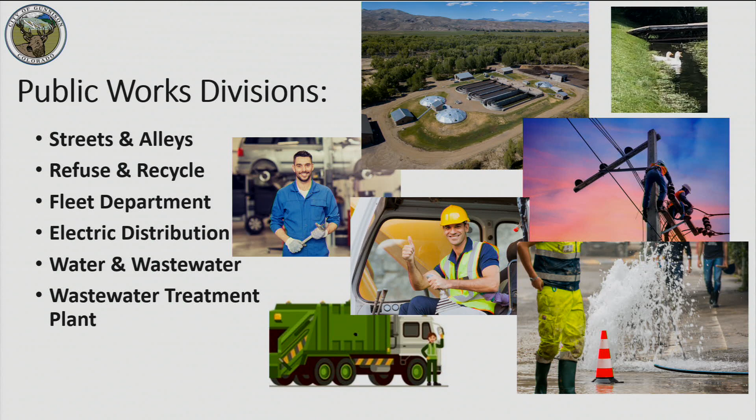Basically what we have is we have several divisions. We maintain the streets and alleys, we pick up the garbage and recycle, and we maintain the fleet for all of the equipment. We also provide electricity for the city, and we treat the water for drinking water and wastewater, and we also have the treatment plant.

So streets and alleys, we have over 100 miles of road. That's about 34 centerline miles, because the roads are so wide that it's a lot to maintain. But we do it, and we do the snow plowing, street striping, and pothole repair.

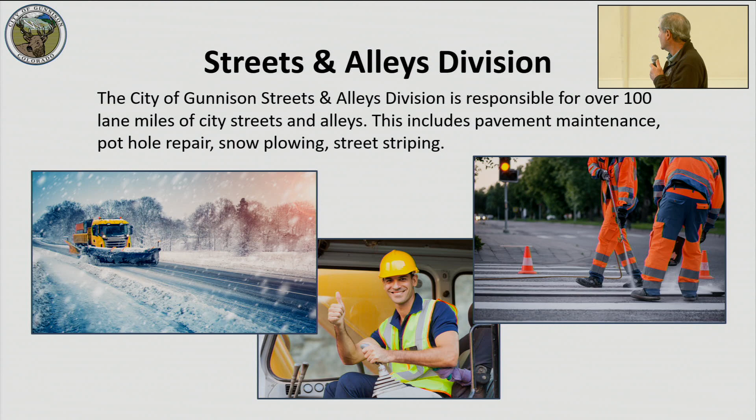We also pick up the garbage and the refuse, the recycle. We have 7 different containers that you can put your recyclables in, because we rely on the county to dispose of the recycled - that's 7 different products that they have. But also we pick up the trash, and I don't recommend filling your dumpsters like that, because that attracts bears and birds and all that kind of stuff.

Also, we do the tree dump. That's just for limbs and leaves and grass clippings and stuff like that. We encourage everybody to do that, because we actually recycle these products. We'll also take concrete and asphalt if it doesn't have steel in it, because we like to use that for our road base. So it's a good thing for the community - it gives you a place, it's a little bit cheaper than the landfill, and it also allows us to recycle the products.

We also do electronic recycling. This is something that we do usually the first Monday of each month, and we take TVs, radios, microwaves, all that kind of stuff. There's a fee for that, but it keeps us from landfilling that, so that's a good thing.

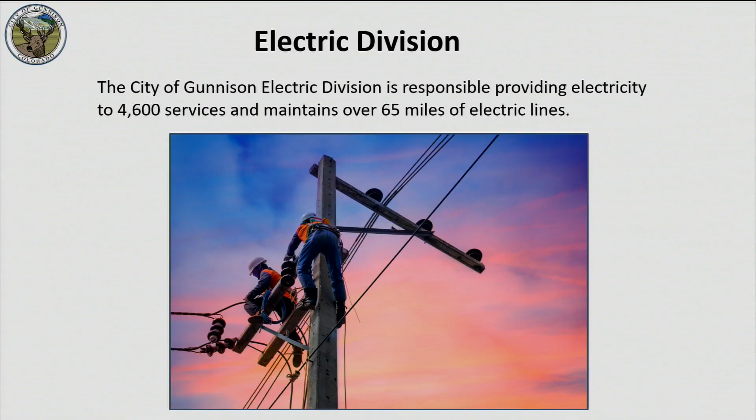So on the water and wastewater, obviously we have water distribution. We have 9 wells in the city - those big brown houses that you see in the middle of the street, that's a water well. When I first got here, I'm like, why would we have a well in the middle of the street? But anyway, that is what we have there.

We also treat all the wastewater, and that's where we return the liquid to the Gunnison River, and then the solids we turn into Gunny Gold.

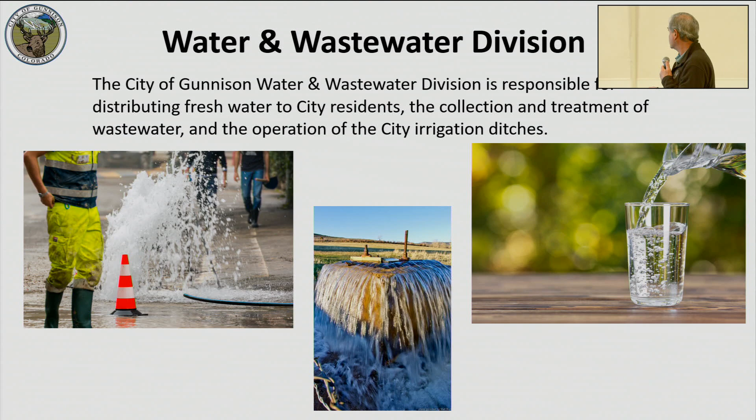The wastewater treatment plant - I wanted to highlight that because we just got through spending $14 million on this plant. It hadn't really been updated since 1985. We found that it was very difficult to get parts for it, so we went in and did a major redo on the plant and increased the efficiency of it. We really looked into energy savings for the plant.

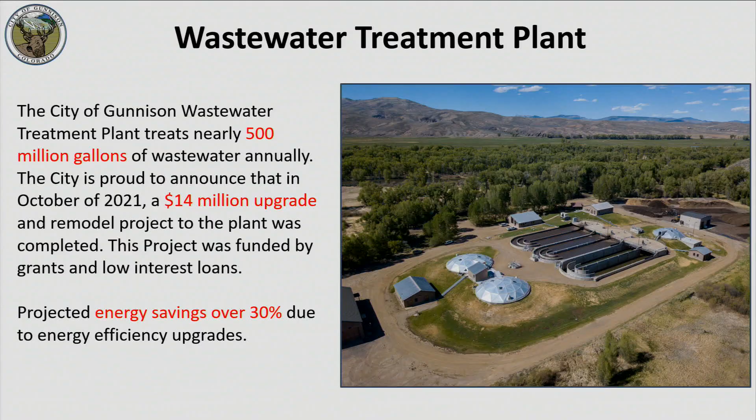We are projected to have over 30% energy savings because of the upgrades we've done, but we treat 500 million gallons of wastewater every year - it's a lot. It's a 4.2 million gallon per day plant. So what does it do? Well, obviously it takes wastewater from your houses and businesses, and we treat it and return the water back to the river, and then the solids go to Gunny Gold.

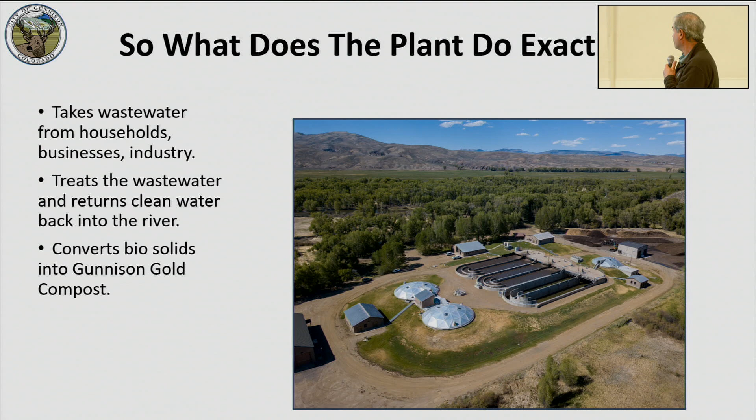It's down at the lowest part of the city or county, because we want everything to gravity flow down to it. So we always put it in the lowest part. That's why you usually see a wastewater plant by a river or something like that. It's west of town.

It's an interesting plant because it treats the wastewater naturally through microorganisms or bacteria, we call them bugs. When you treat the waste, you have to encourage a good environment for the bugs to live. You have to inject oxygen, and that's why we're picky about what people put in their waste. We don't want oil, grease, or chemicals in the wastewater stream, because the bugs don't like that, and it kills them. You can have an upset at the plant where all the bacteria dies because of the ecosystem, and it takes about a week to grow it back. So it's very sensitive.

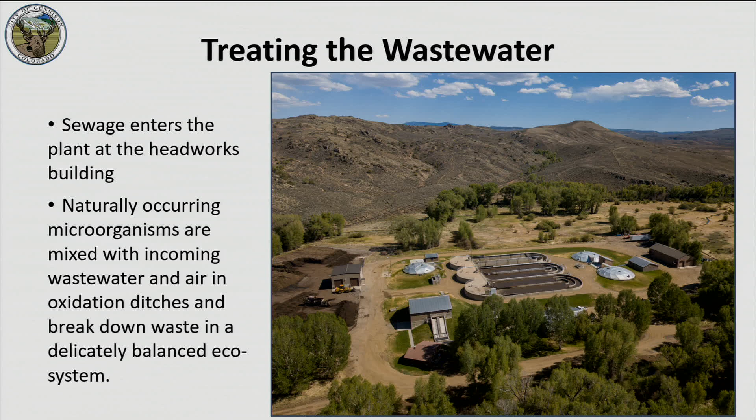One of the big improvements we did was at the headworks, that's where the sewer first comes into the plant. The old screen system was about 38 millimeters wide, which allowed a lot of rags, sand, and grit to enter the plant and clog up the pumps. The new system we have is 5 millimeters, which really helps us maintain the plant so we don't constantly have problems with rags getting into the stream.

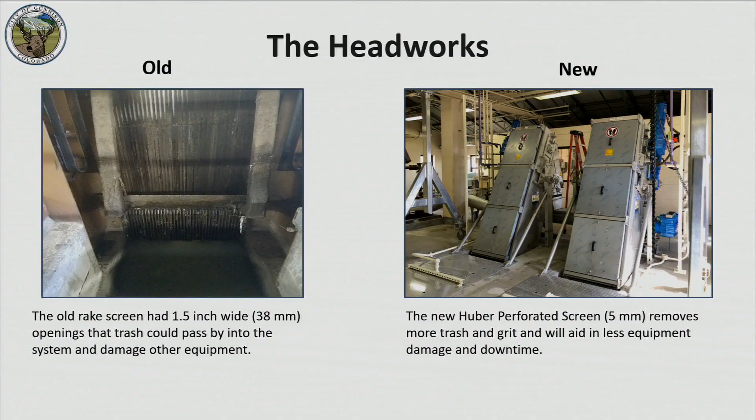Also, the oxidation ditches, that's where secondary treatment occurs in the plant. They have huge motors that spin and create turbulence, injecting air into the wastewater stream. The old motors were just turned on or off, about 125 horsepower, constantly turning at a set RPM. Now we have new variable frequency drive motors, and we have dissolved oxygen probes in the wastewater that measure oxygen levels and send a message to the motor telling it to spin at a certain RPM. So now we're only spinning what we need to, with no excessive spin.

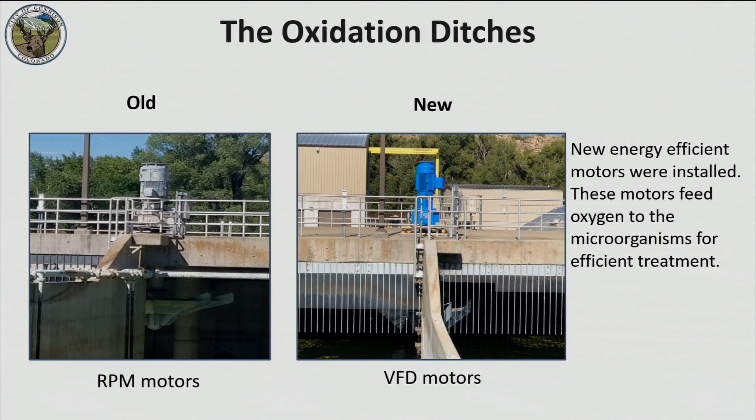You can see in the video the big 125 horsepower motors spinning, creating oxygen. Before, at night, that ran all the time, and that was a huge energy consumption part of the plant.

So at night now we put these small mixers in, only 5.4 horsepower, which just keep the flow moving so it never stops, because you don't want the suspended solids to settle to the bottom. You want it to stay suspended so that the next morning the big aerators can put the air back in. That's another reason why we're anticipating a 30% reduction.

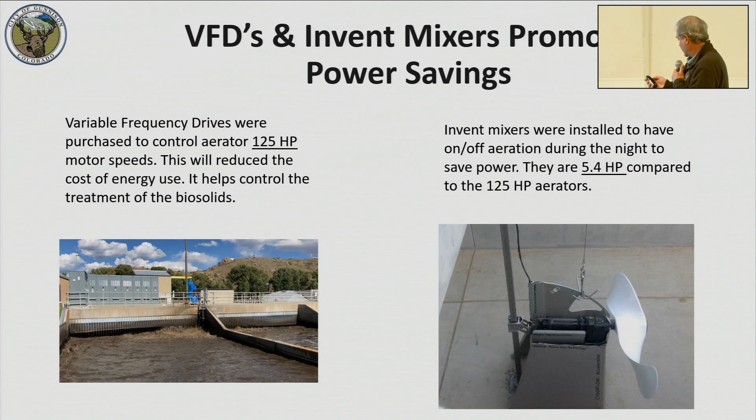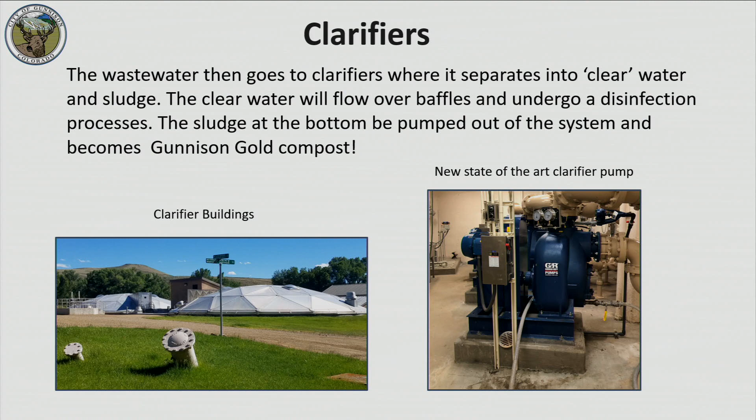These are the clarifiers, we completely redid them, and that's where separation occurs. The liquid stays at the top, and you want the sludge, or biosolids, to settle and go to the bottom. We use new efficient pumps now to pump that back to where we make the Gunny Gold, and the liquid part goes to the UV disinfection system.

That's the UV building. The old one was actually the first permitted UV system in the state of Colorado, so it's very old. It was an open vat system with bulbs that would shoot ultraviolet rays into the water, and that's what you want, because the UV completely destroys the harmful pathogens.

When we return the liquid to the Gunnison River, we want it to be clean. I wouldn't drink it, but it really looks like drinking water. These are in-vessel reactors, you can see on the slide where all the bulbs are, about 60 of them in there. They blast UV light in there and completely kill the harmful bacteria, then allow the water to go to the river.

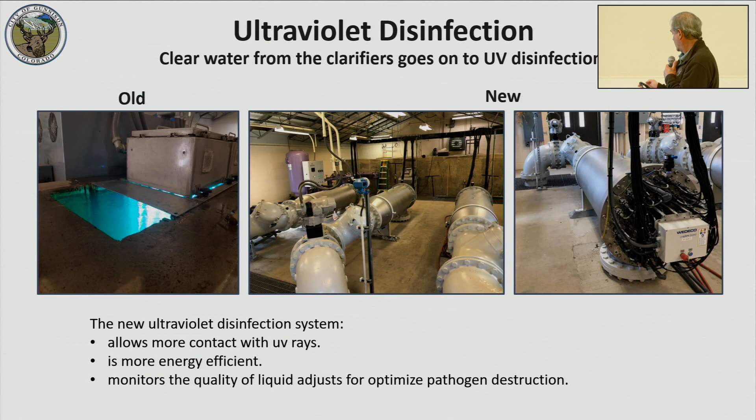And that's an outfall. That's not the one that we have, but that's similar to it, that's where the water goes back to the river.

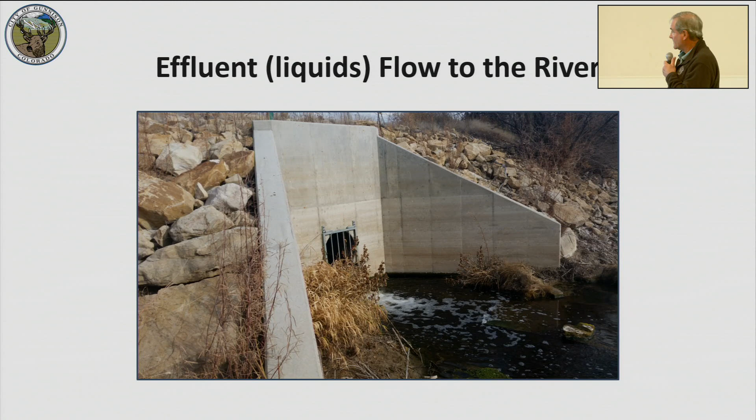After we do that separation, the biosolids come into this big pile here. We take the tree chips and stuff that come from the tree dump, mix it with the biosolids, and compost it. It's got to be at a certain temperature, and it sits there and cooks for about a year. We have Wi-Fi probes in there that measure the heat, so we know when we need to stir or mix it to optimize the breakdown of the materials.

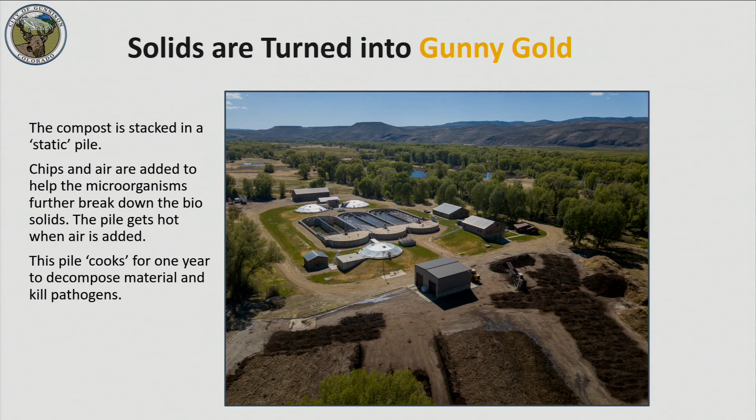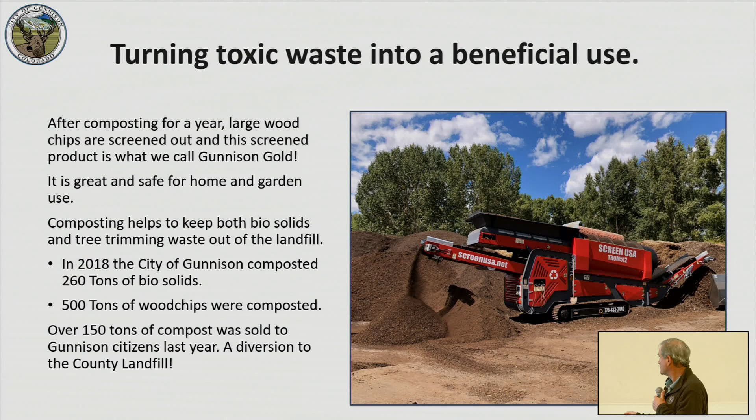Another feature of the $14 million we did at the plant was we completely upgraded the laboratory. It's a certified laboratory, and it serves over 100 different water systems around in the community. Some of you probably have wells and want to test it to make sure it meets state regulations, so that's where we do it. We also test all of our stuff as well.

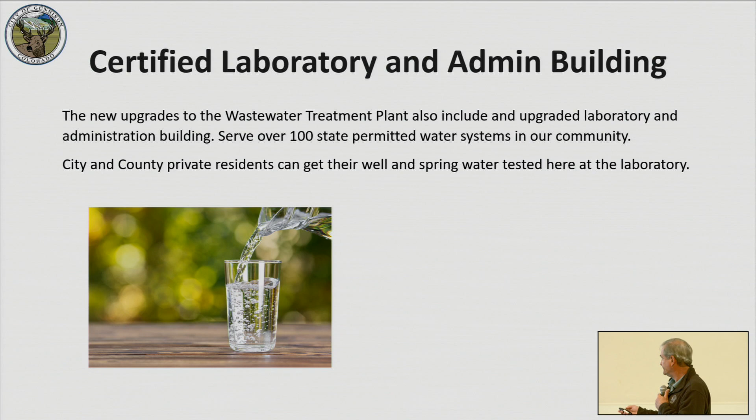Another great feature of the upgrade was the SCADA system, that's a supervisory control and data acquisition, and we connected it all with fiber optics. Now we have fiber optics that run from the city out to the wastewater plant, because it was so remote before that we didn't even have Wi-Fi or couldn't connect with servers out there. Now we have fiber optics that go out there and communicate, and you can see one of the operators there, he pulled that up.

Those circle looking things are called the oxidation ditches, and he can go in there and see what's going on, see how much oxygen's in there. You can see on the left the two red parts, and then you've got a green. The green means that aerator is running at that moment, and he can run the plant from an iPhone now with the SCADA system.

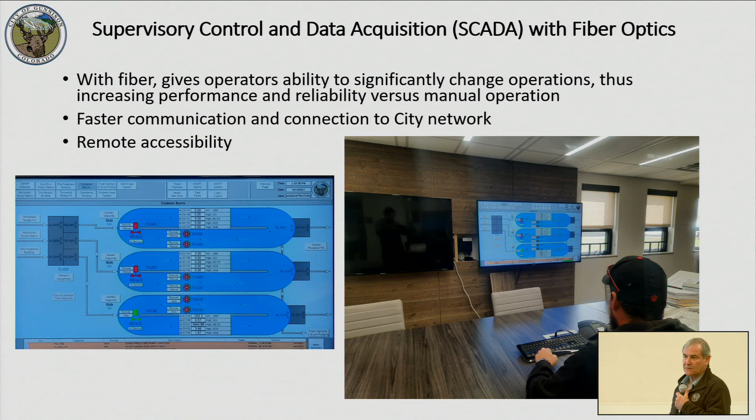Before we had that, we basically just had a big switch, on or off. Now we've got fiber optics, SCADA. The SCADA will talk to the motors, tell the motors when to spin, when not to spin.

It's very sophisticated now. Lastly, we're very excited about the upgrades we're going to do to the RV dump station out there by the airport. We're putting in new equipment, and also it was on the honor system. We'll have a way to measure and bill, where you can stick a credit card in there and take care of that, and there's also going to be a water fill station there too.

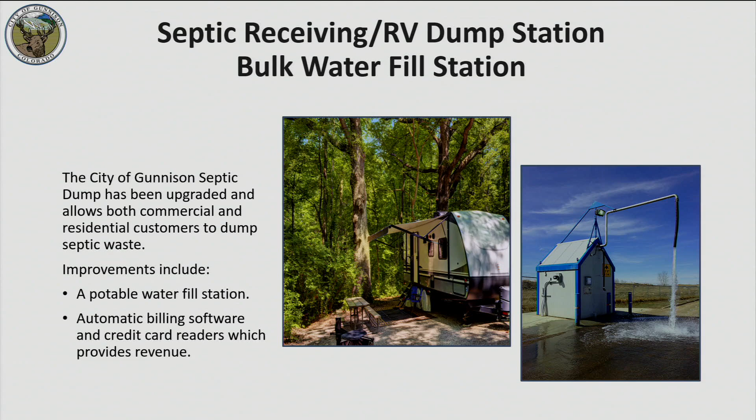So it's going to be a big improvement. We hope to have the water part done, not this year, but we hope to have the sewer part done by November. So that's what we do at Public Works. If there's any questions, I'd be glad to answer.

Yes, sir. Do you have any knowledge about the county, university, city solar electric project?

Yeah, that's one of our projects. That's an 847 kW facility. We've partnered with the county and Western on that. Western will get a third of the production, the county gets a third, and then the city gets a third of that. The county is doing upgrades to the airport, and they're going to put a covered parking lot in there, so we're going to put the panels on top of that roof system and generate electricity there.

The Western donated some money, and the county provided the structures and the land, so it was kind of a 1/3 split on that. So yeah, we're excited about that for sure.

My understanding was it was going to be online this month, but what's the status of that? Well, we were waiting for the county to get the roof system up, and they've had some issues getting their plans out. We've been ready for about a year to do it, but we have to wait until it's ripe to do it out at the site. So that's what we're doing.